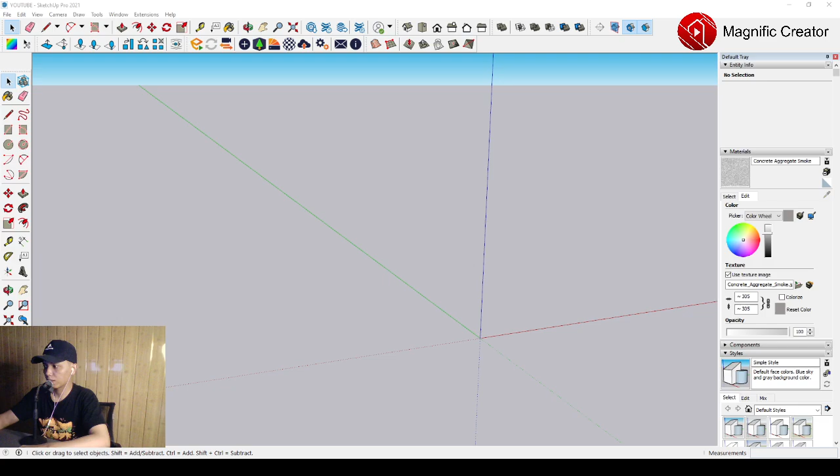In this video, I'm going to explain to all of you about how to make a wall-mounted shelf with drawer.

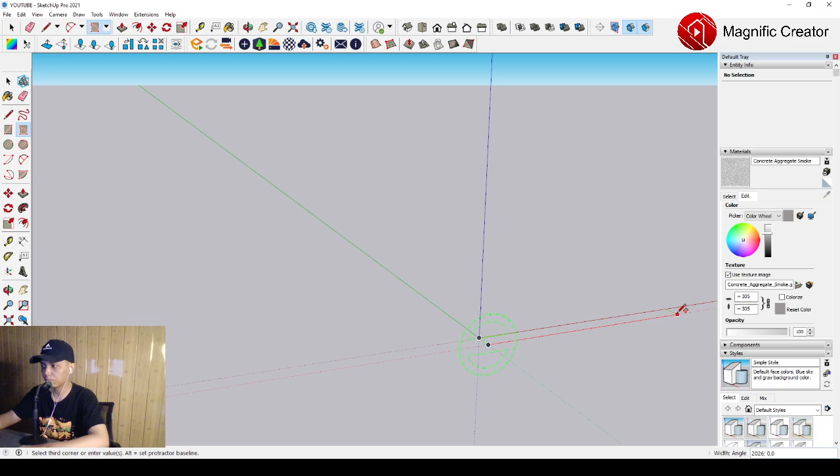First of all, we have to make the existing wall. We can make it with a rectangle or rotated rectangle. Maybe we can use the rotated rectangle as the simpler way. We can make the width of this wall around 150 millimeters, and then type the length around 3000 millimeters or 3 meters. Then we push it up around 3000 millimeters, just like this.

We can select it and make it a group anyway, and then we can make the basic shape of this wall mounted in the wall.

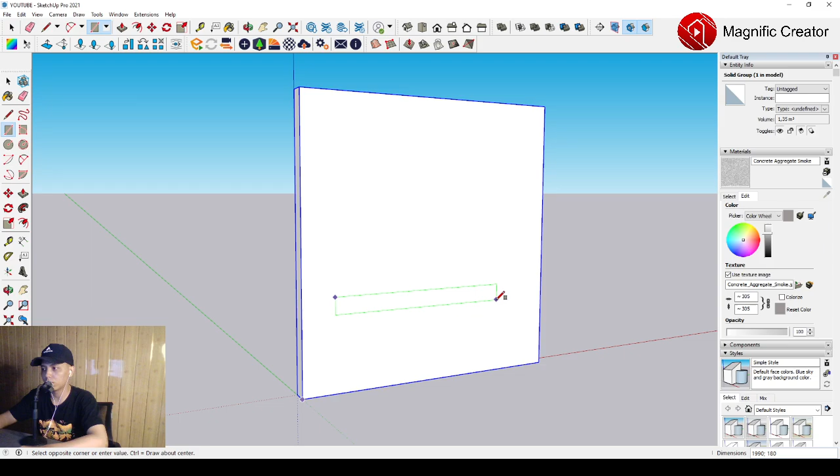We can select a rectangle and set it with any size, something like this, maybe around 2 meters, and for the thickness around 260 millimeters, and then we set the height around 5 or 400 millimeters only.

Then we can make it a group anyway. And then we can make the center line with the tape measure tool over there. We can place it on the midpoint, then click and drag it to the right side around 400, for example, and then drag it to the left side 400 millimeters also.

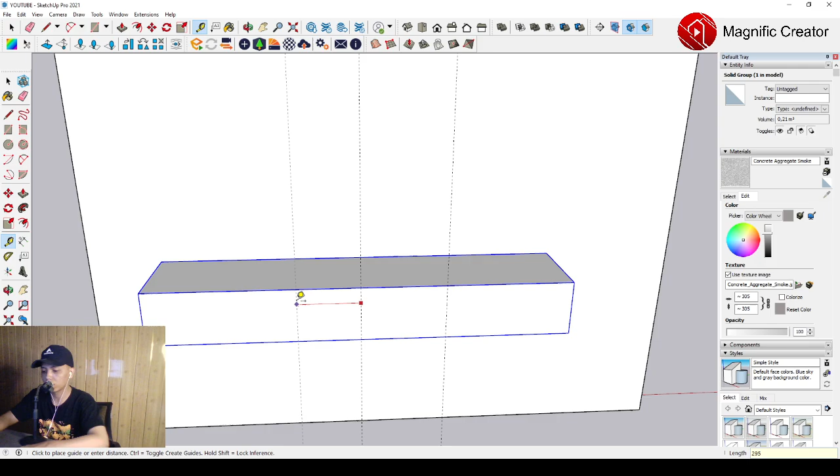Then we can click this, then click this, and we can make the line over there. Then we can offset it inside around 15 millimeters, and push it to the back around 380 millimeters only. So you can get it.

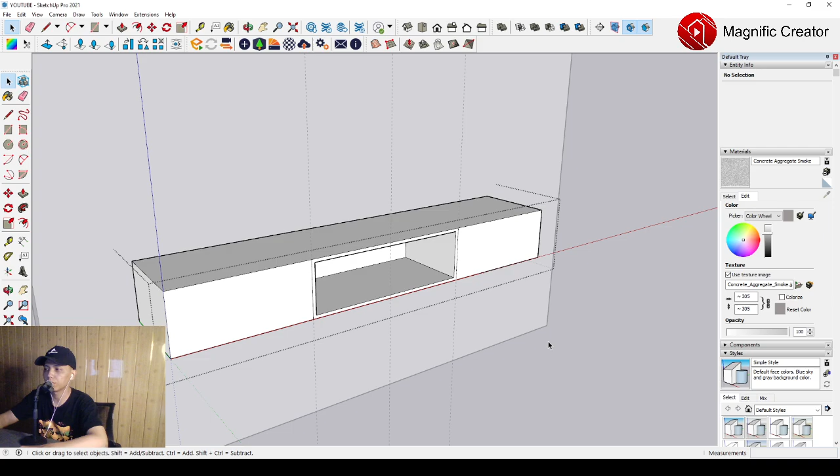After that we can make the rectangle over there with this tool, and then we have to push it until it touches the bottom plane on the top shelf, and then we can make it a group.

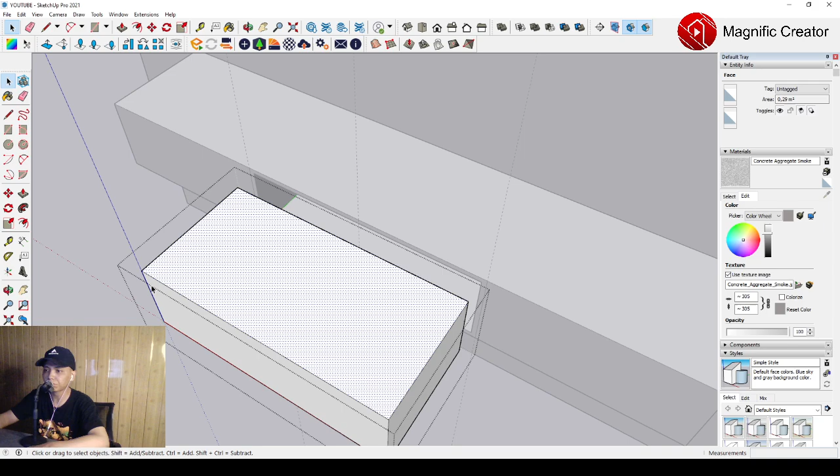Then we have to move and duplicate it inside, moving it forward, and then we can duplicate this line. We can duplicate this line to the back side around 30 millimeters, and then offset it inside around 15 millimeters, then push it down until 200 millimeters.

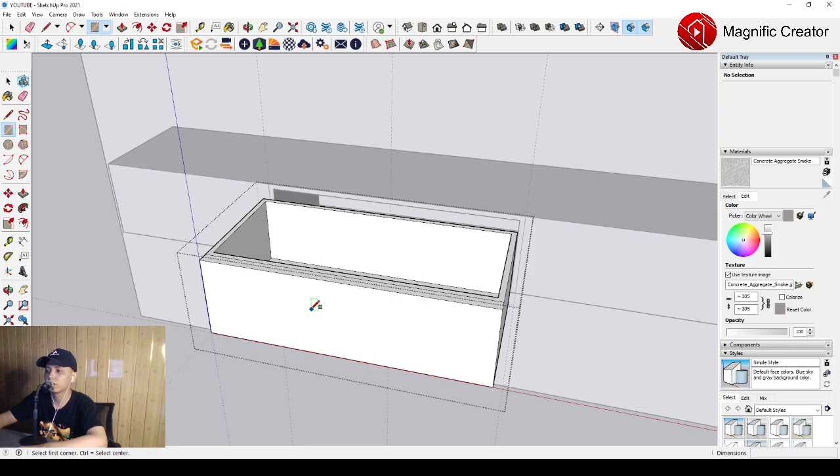Then we can make a rectangle on the center, and push it to the back until this position, and then we can see it.

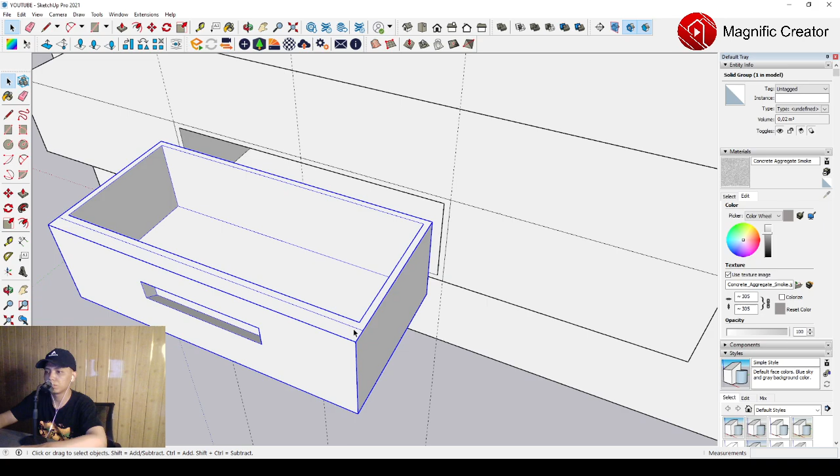Then we can click this line, and then select move and move it down, just something like this. And then we can move it back to the original position.

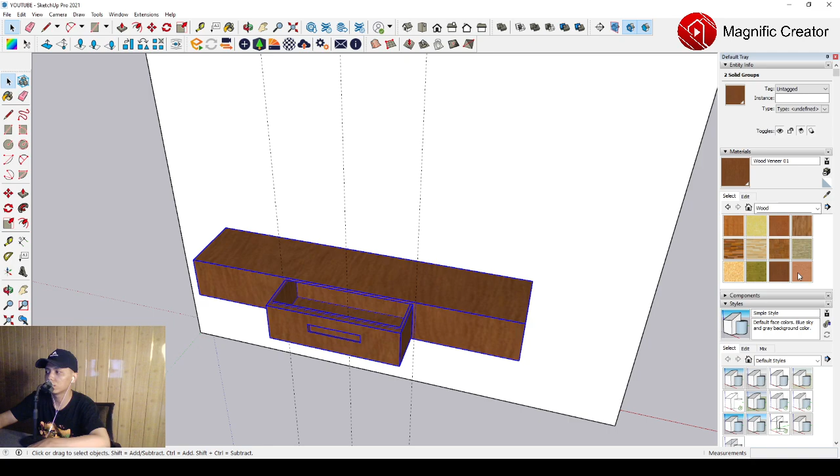Then we can select it all, and we can select the material with wood. We can just select this wood veneer number one, and it looks like this, or maybe we can select another material to make it more representative.